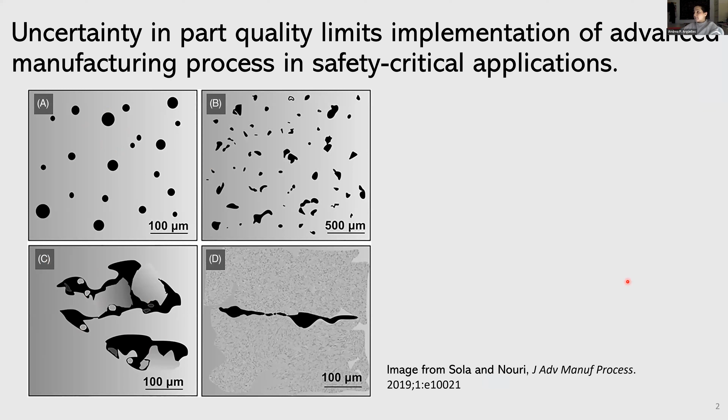For example, something like round porosity that you see in the very first figure is going to affect the response of your material quite differently from something like the figure on the third panel, where the damage is more localized, and that's going to act as a stress concentrator differently from a distributed porosity like this. When we think about how characterization is usually handled, we're generally dealing with processes that require pretty extensive sample preparation.

So when we think about things like microscopy, whether scanning electron microscopy or optical microscopy, you need to section the sample and prepare the surface sufficiently well to be able to get the information that you need.

You can have properties or features in one particular section of a sample that, when you move to a different location, are not necessarily going to translate. That's essentially the problem we're trying to address. So in my group, our research is using ultrasound for the non-destructive characterization of materials.

The way I like to frame this is that we do it at multiple length scales. We're not necessarily saying we're going to get the level of precision in imaging that you'd get from some conventional techniques, but you'd be able to map it over a larger surface so that you can do subsequent inspection with some of those methods to obtain the information you need.

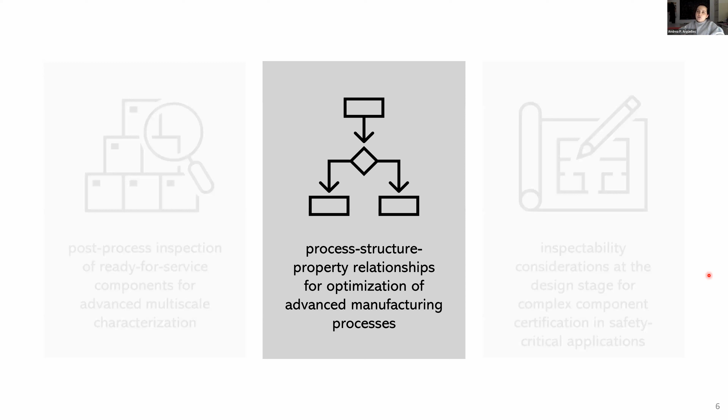But the one that I'm going to focus on today is, how do we use ultrasound in the development of process structure property relationships? Essentially, as I was mentioning before, in a lot of the structure characterization we do in conventional development and manufacturing processes, we're relying on this very time and resource intensive process of having to break samples open and understand what that internal structure is.

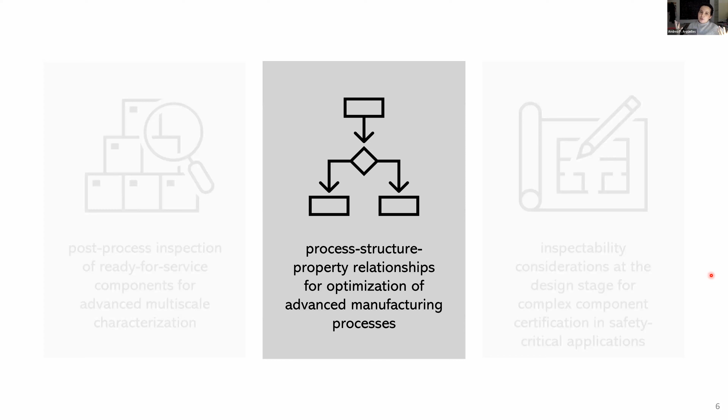So essentially what we're trying to do in my group is instead implement ultrasound as a technique that you can use to understand those internal structures, understand ultimately the performance of the parts, and then figure out how to modify the process to obtain an optimized version of the parts that you're trying to make.

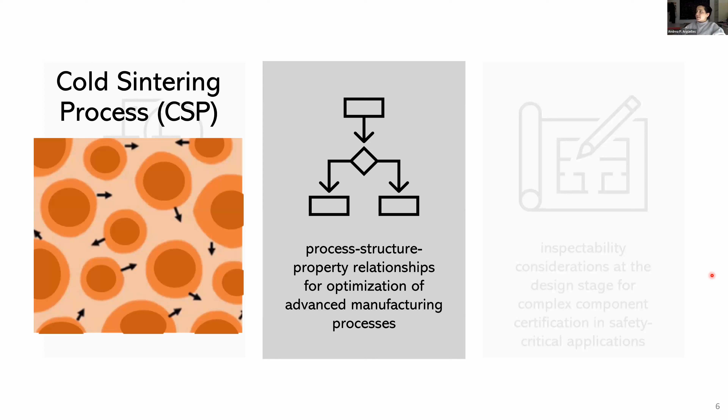I'm going to talk about this in the context of two different manufacturing processes. The first one is the cold sintering process, and the second one I'm going to talk about is binder jet printing. The cold sintering process, as the name would suggest, is a sintering procedure, and this is going to be focused on ceramic parts. For binder jet printing, this is a 3D printing application, which for that portion of the presentation, we're going to focus on metal, stainless steel specifically, parts.

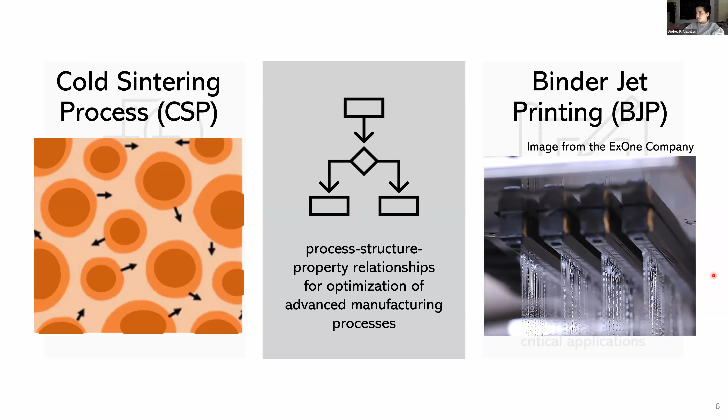So how do we actually use ultrasound to understand this? In the conventional NDE sense, we're dealing with the direct reflection of ultrasonic waves by an object in the material. So we're dealing with diffraction limited imaging, where you essentially need flaws that are at least half that wavelength in order to get a reflection from the flaw, which is fine.

We do use some of that information for some of the parts, because even though the process should be optimized to not obtain flaws that are that large, the reality is that sometimes in the responses we're getting, we're seeing that that is still happening. So we're getting direct reflections from some of the features that are coming up in the part, which I'll talk about particularly in the cold sintering components a little bit more when we get to it.

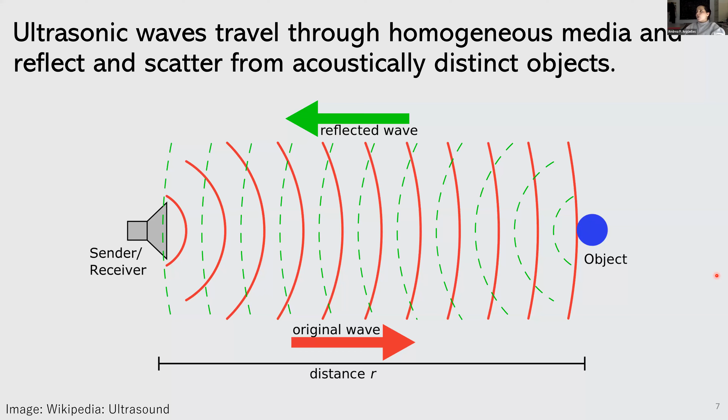But really what my group is focused on is, how do we use some other ultrasonic parameters to get more quantitative information about the microstructural features? Now, this is where we have a little bit of a trade-off. So what do we have to give up in order to get information that is at a smaller scale? In our case, what we choose to give up is the ability to directly image.

So essentially what we're dealing with is we're propagating waves through a finite volume and then obtaining statistically relevant information about the microstructure in that volume. So if you think, for example, of a collimated beam from just a piston transducer, we're essentially saying, in that cylinder that you're inspecting with that transducer, what information can I gather through quantitative parameters?

The ones I'm going to show you today are part of that first round of characterization we can do, and that is wave speed and attenuation.

As a crash course, we know wave speed is related to the effective properties of the medium the wave is propagating in. In our case, we're not going to relate wave speed to something like porosity directly, but we know there's an inverse relationship between these two parameters. So how do we get this information and combine it with some of those mechanics-based models I talked about before to obtain quantitative information about porosity in the parts?

Second, we have attenuation, where although it's also dependent on the effective properties of the medium, the main use we're applying this for is characterization of scatterers smaller than that half-wavelength limitation we talked about before. So essentially, although I'm not getting a direct reflection from the feature in the propagation path, I know my wave will lose more energy as it propagates through a volume with localized features. These wouldn't necessarily affect wave speed directly, but they're definitely impacting the scattering and absorption of that wave as it propagates through.

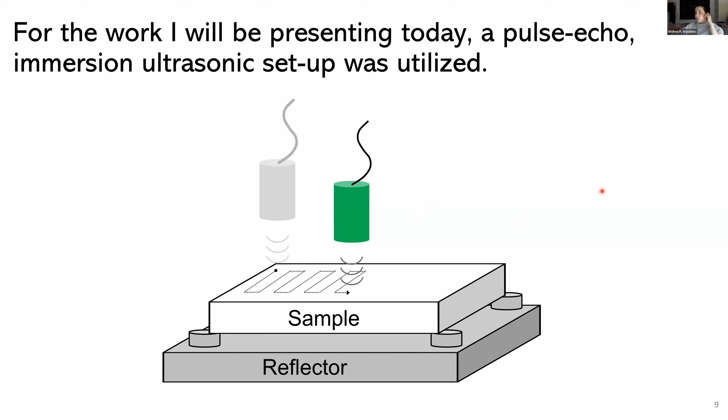So essentially, we took the samples, raster scanned them, and obtained quantitative information at every single point - a whole A-scan at every point that we could post-process to obtain quantitative information about wave speed and attenuation for the two different sample sets I will be discussing.

All right, so first I'm going to talk about the project that has to do with the cold sintering process.

The results I'm presenting here today were all collected and analyzed primarily by my PhD student, Haley Jones, and my previous master's student, Elizabeth Trotman. This is all done in collaboration with Professor Susan Trolier-McKinstry in the Department of Material Science and Engineering here at Penn State.

I assume for most of you, cold sintering is probably not something you're nearly as familiar with as ultrasound. So I thought it was important to start with a little bit of a crash course on what I mean by cold sintering.

Cold sintering, like other sintering processes, is essentially a process to apply pressure to bring particles together and solidify into a material. The main difference is that if you think about sintering a ceramic, you'd more than likely have to deal with temperatures in the 1,000 degrees Celsius range and pretty high pressures. In the cold sintering process, the objective is to bring these temperatures down significantly - hence the name - so we can reduce the energy resources needed to sinter these materials.

You have a powder that you mix with a transient liquid phase. That transient liquid phase assists in the densification of the powders once you apply uniaxial pressure, but still staying an order of magnitude lower in the temperatures we need. At the end, you have a densified solid with hopefully the desired microstructure, and we can achieve many compositions.

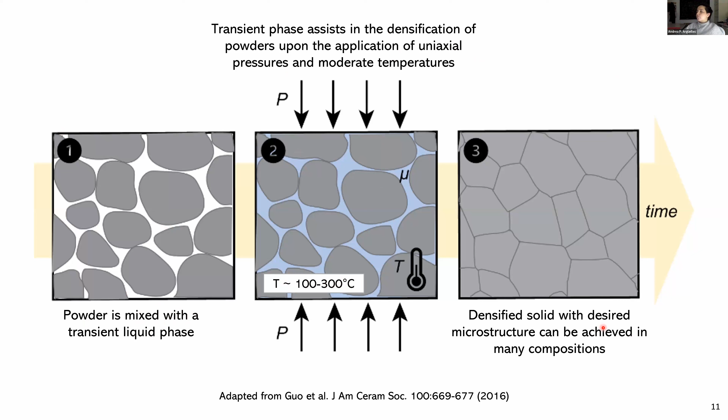The main challenge here is that we have macro and micro flaws that arise and deteriorate the mechanical and functional properties of these materials. So what I'm citing here is a couple of different things. First, let's talk about the picture in the background.

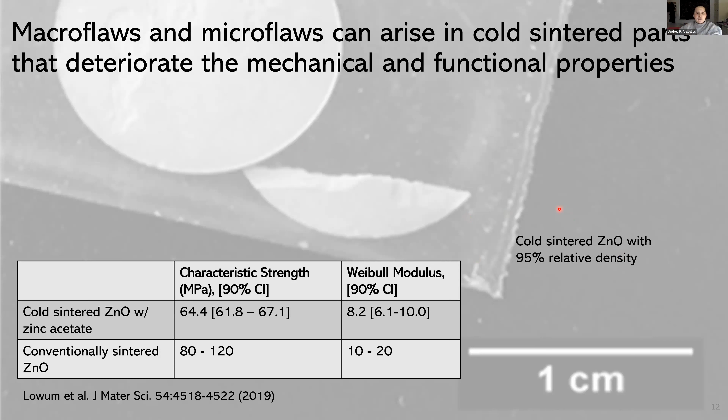As I mentioned, the standard is to use relative density measurements, and as you can see from the example in the back, and from some more in-depth data we've collected, that's not necessarily reliable. So what we wanted to do was say: if we create a set of samples that has some range of relative density, how does that compare in the context of their ultrasonic properties? And is that more representative of the mechanical and functional properties we're getting for the parts?

So what we did is we took two sets of cold sintered zinc oxide samples, and the main difference here was that we dealt with two different transient phases. That liquid phase that I talked about that facilitates sintering—I'm going to come back to that, because it turns out that transient phase is actually critically important, and ultrasound allowed us to identify some of the ways in which it affects the final part.

So we did two sets of that, and you see we have a range in the relative densities that goes from 80 to 97%. In order to obtain that range, we needed to change things like the pressure, the temperature, and the sintering time. And then the final thing we played around with, because of what ultrasound enabled us to characterize, was the heating rate.

That brings us to some of the ultrasonic results and what we learned from this type of analysis. The first thing we did was look at the wave speed—a pretty simple metric to start with. We were collecting full A-scans at every location, and we could do a cross correlation and get a quantitative measure of the wave speed, again thickness independent based on the type of measurements we were collecting.

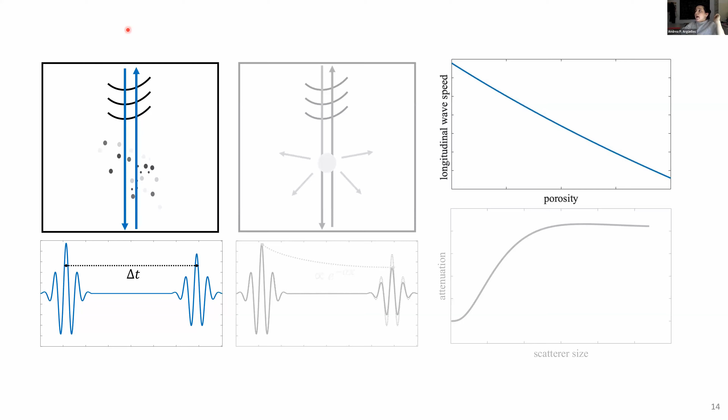In doing this, we were able to identify some of the things happening in terms of the evenness of the pressure applied on the parts, and the evenness of the temperature distribution of the part, as well as that liquid phase distribution.

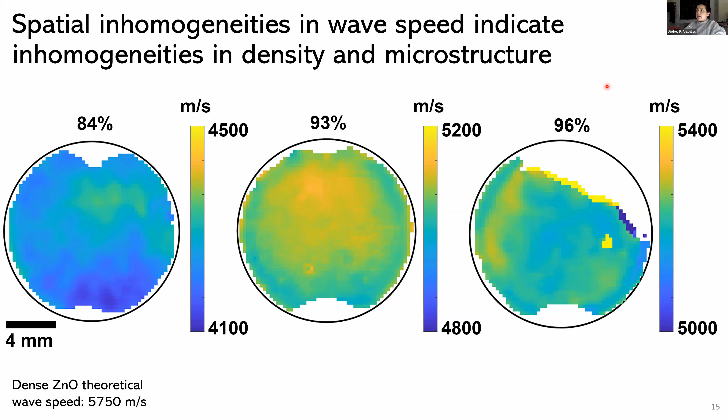That already started sparking some conversation about what could actually be causing the difference between these. The other thing we noticed is that because we were using geometric relative density values, a lot of times we were missing the fact that for some of the larger samples, there were actually large delaminations that we get direct reflections from. So this is already quite informative in the context of what was happening in the sintering process and the changes we could make to the processing.

So again, by characterizing the samples with ultrasound, we were able to identify some of the pieces that we could put together and ensure that we were getting a more uniform sample.

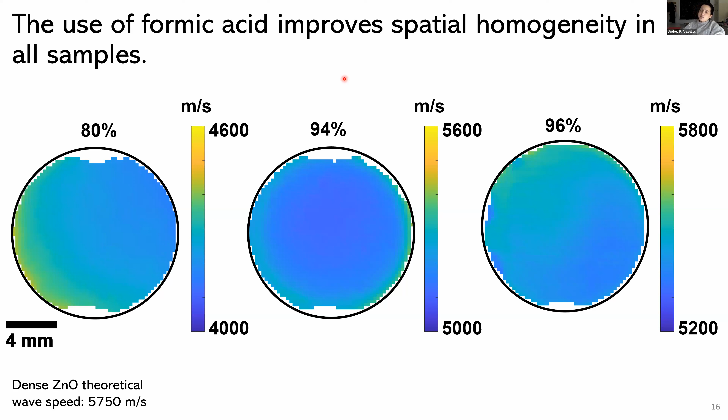So this was all great in identifying individual samples and their variations, but what we really wanted to do was now understand, on average, some of these average properties—why weren't these samples matching up with what we would expect for a fully dense zinc oxide sample.

So what you're going to see in the next couple of slides is that we actually started to look at some micromechanics models to understand the effective elastic modulus of each of these samples relative to the shape of the pores that were within them.

We knew for a fact that there was going to be porosity—we had relative density measurements that reflected that. But what we did not know was whether those pores were fairly spherical and uniform in shape, or if they had some preferential shape that we were perhaps capturing with some of our ultrasonic results.

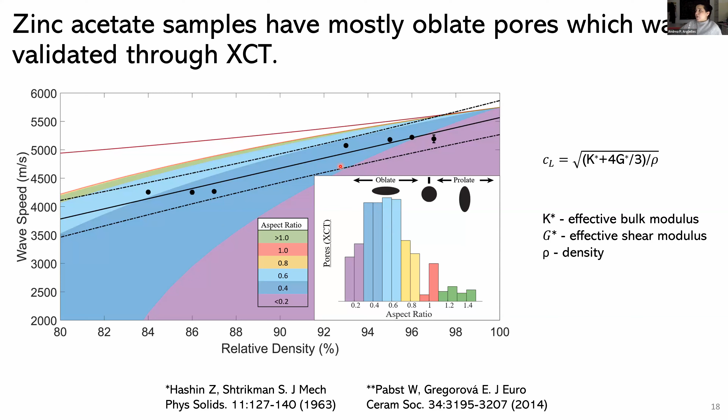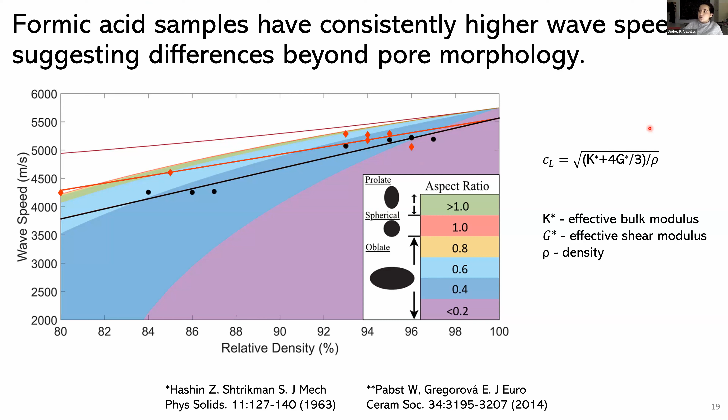Part of what this illustrates is that samples processed with a different liquid phase are going to have different effective properties. This can help us identify different parameters we can change in that manufacturing process and understand how these parts behave, which brought us to the analysis of some of our ultrasonic data.

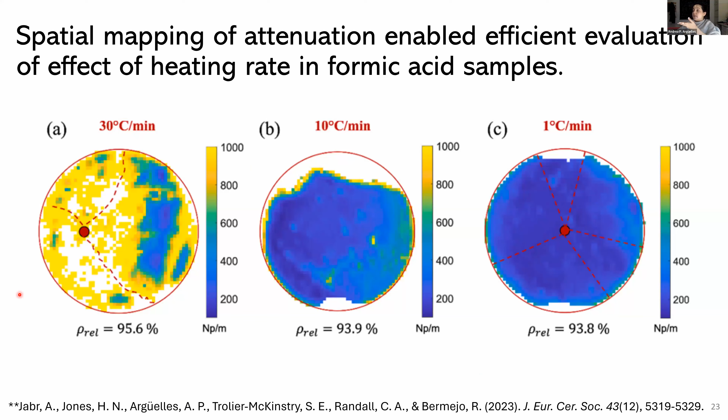And the use of ultrasound for characterization allowed us to do this a little bit more efficiently. So we didn't have to create a large volume of samples to test at the different temperatures, but rather a smaller set, while also giving us that information more conveniently.

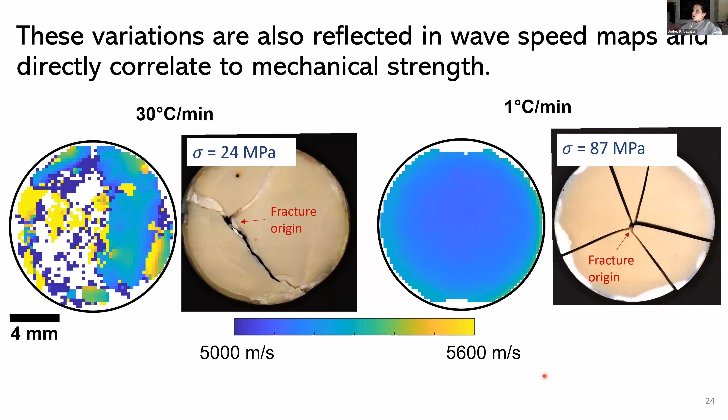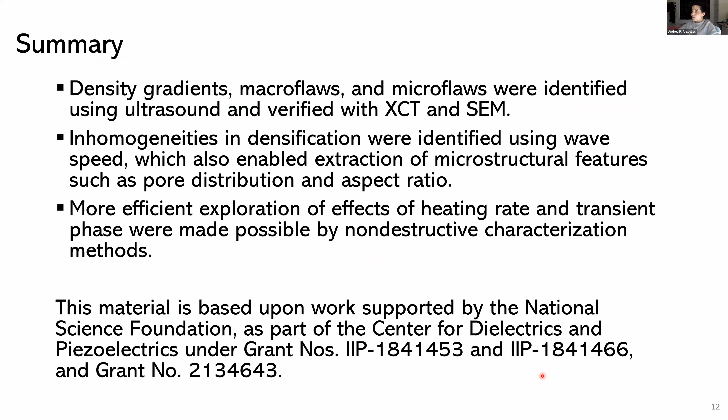This material was all supported by the NSF grant that I listed at the beginning. You can kind of see in summary some of the variations we were seeing with the samples. Which brings us to the second set of experiments I want to talk about, the binder jet printed samples.

So we're switching over to metals and to a 3D printing process. This work was supported by the 3M company. Most of the results you're seeing here today were obtained and analyzed by my student Olivia Cook, a PhD candidate in my group. This was done in collaboration with Alison Beese in the Department of Engineering, Science, and Mechanics, and her student Nancy Huang. Chris Kube was also involved in the analysis of the data you're seeing in this section.

For those of you not as familiar with additive processes, or particularly with binder jet printing, it's essentially like a lot of the other powder bed processes where you're laying a layer of powder and additively creating a 3-dimensional shape. The main difference in binder jet versus something like powder bed fusion, where the powders are fused together using a high intensity laser, is that in binder jet we're using an organic binder.

The organic binder essentially just holds the particles together for now, and then you go through a secondary step of either sintering or infiltrating with a second material to actually bond everything together. So you burn off the binder and then you either infiltrate with a second material or just sinter the part itself. We've done analysis of both infiltrated samples and sintered samples.

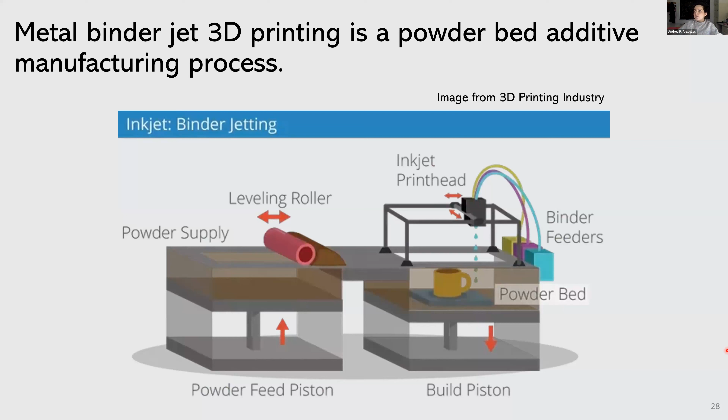I'm only focusing on the sintered samples today, particularly a sintered block of stainless steel 316. Now, I feel like most of you can probably relate to the fact that we wanted to start with the simplest case scenario and just start with a sample that we thought the behavior would be rather simple. We could establish some baseline in the ultrasonic response and then move on in complexity.

So we wanted to do just a block that was an inch by an inch, couple inches, so 25 millimeters, and 50. We just wanted to ultrasonically test that. This is what the company that provided the samples said was their optimized process, surely this is going to work smoothly, and these are going to be samples that are rather easy to analyze.

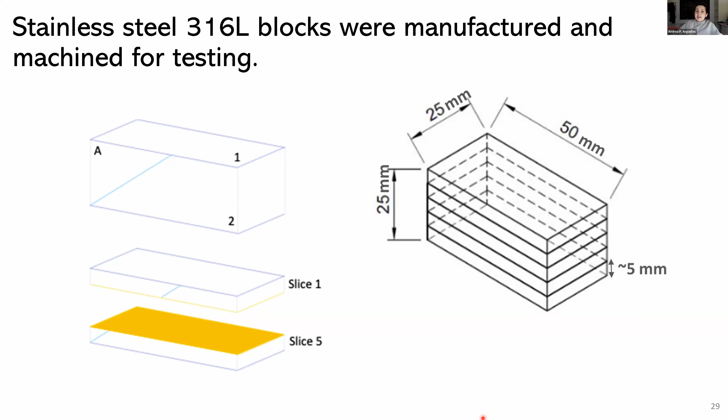But the reality was that once we started doing that testing, we actually got quite low transmission through the center of the samples and much higher transmission around the edges. So this was already suggesting that the samples weren't necessarily as simple as we anticipated.

And it ended up being a pretty interesting analysis of what resulted from these samples. So it was all good in the end, but this was kind of our first indication that maybe these samples are not responding the way that the manufacturer thinks they are.

Now, to begin with, these were fairly large samples, an inch in height and width, so that didn't necessarily lend itself to very detailed analysis. So we went ahead and sectioned the samples and rescanned them with our thickness independent method to get wave speed and attenuation on some of those thinner slices.

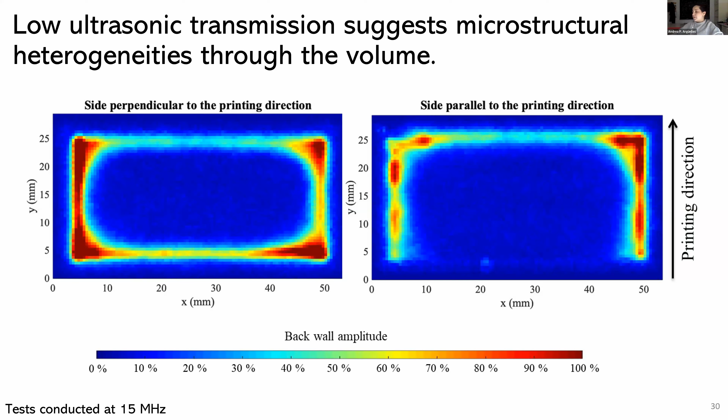The samples were sectioned something like this. So you have the printing direction, and then the slices just kind of cut across as we go through the depth of the sample.

Now, when we cut up these samples, we kind of expected that porosity was going to be the dominating factor. You know that's kind of the name of the game when it comes to additive manufacturing. Porosity seems to be that primary issue, so we assumed that would be what dominated the response we were seeing in these samples. When we look at the attenuation results, that supported it.

So we cut up the samples, and you see that the sample in the middle has higher attenuation, while the ones at the edges have lower attenuation. That makes sense - it's all in line with the fact that we're getting low and high transmission in those areas respectively.

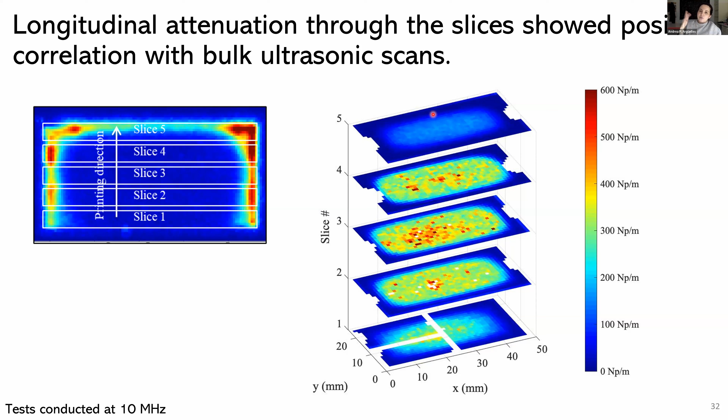But then when we look at the wave speed, if porosity was the driving factor, we would have really anticipated that as soon as you're moving away from the edges of the sample and towards the center, the wave speed would immediately drop, and we'd see that relationship to porosity. But that's not really what we were seeing. We were seeing about a 5,800 meter per second wave speed, and then it would jump to about 5,900 before actually dropping to a much lower wave speed in the very, very center of the sample.

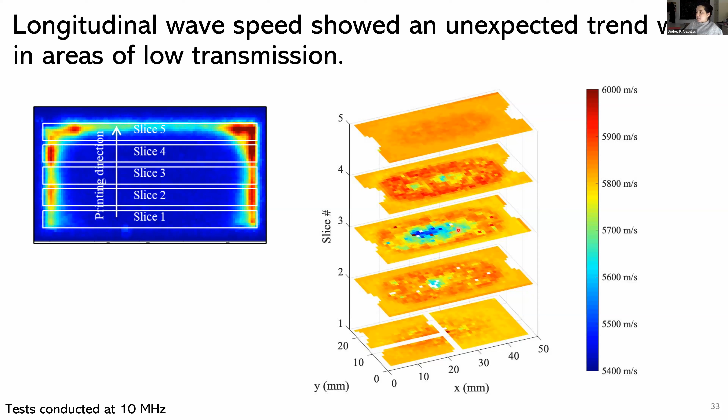So we went ahead and did a little bit more quantitative analysis of the porosity at the different interfaces. We took the samples and did optical microscopy, sectioning the different pieces, and sure enough, there was a little bit more porosity right in the center. But going from the edge to that middle region of the samples wasn't really supporting that porosity was the driving factor in our ultrasonic response.

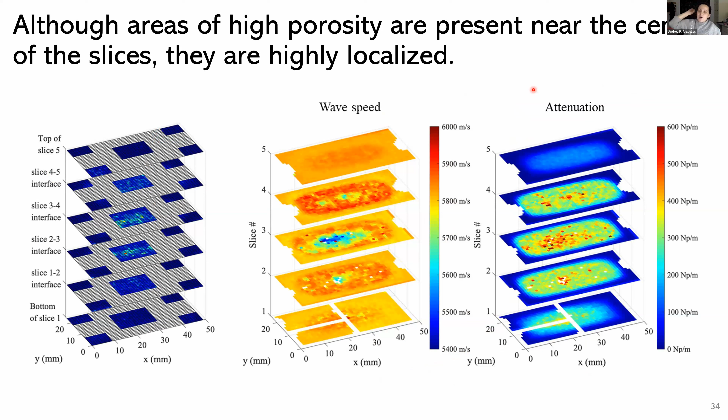Now, being someone trained in scattering and polycrystalline media, obviously our next thought is always to go to grain size, and that's exactly what we did. What you see was actually rather interesting, particularly in the context of what had been previously reported for binder jet samples.

And then the other thing we noticed that we thought was interesting was that in the center to edge region, the pore structure we were seeing in the samples was round and isolated. But then once you got to the very center of the sample - and we could only look at this in the 2D plane, at least for now - what we saw was that the pores were pretty irregularly shaped. This got us wondering how these pores were actually to be represented if you were to look at them in a three-dimensional space.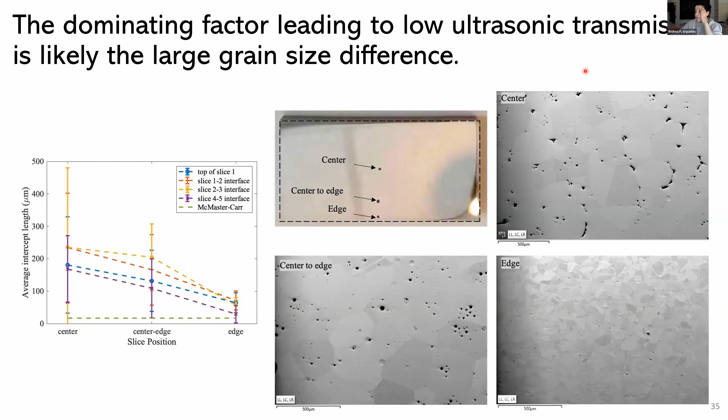So in order to analyze that further, we took some tensile specimens from an equivalent block. This wasn't the exact same block we had tested before, but it was created with the exact same conditions. We took them from different regions that we knew were going to have a little bit of that varying response - so we wanted some in the area with really small grains and almost no porosity, some in the area with large grains where the pores were in the grains and the boundaries, but rounded and separated.

And then some where you had this much more irregularly shaped pores, mostly concentrated between the grains, and see the response of these and how those varied.

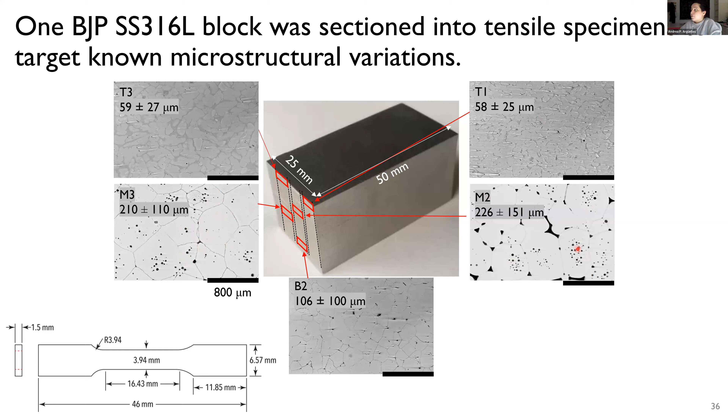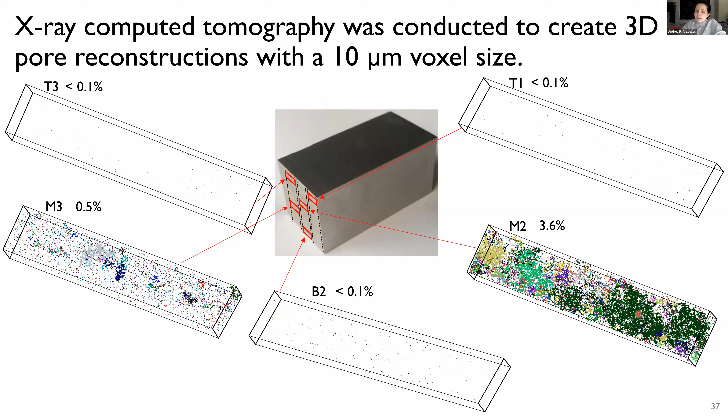So this was already pretty informative in terms of what was happening in the behavior of these parts. So we went ahead and did our same ultrasonic measurements as before - thickness independent wave speed and attenuation mapping.

And then for the pore reconstructions now, they're simply oriented in the plane that the wave is seeing it in. All of these measurements were longitudinal waves that were normal to the surface. So we essentially just reoriented the maps so that we could one-to-one look at the relationship between that and some of the ultrasonic parameters.

In order to do that, we separated our analysis between low and high porosity regions. The way we defined this, just for the purpose of this analysis, was anything less than 0.5% by volume is considered a low porosity region. We separated our data relative to the voxel size we were able to obtain from the transducers we were using and the spatial resolution of the maps we collected.

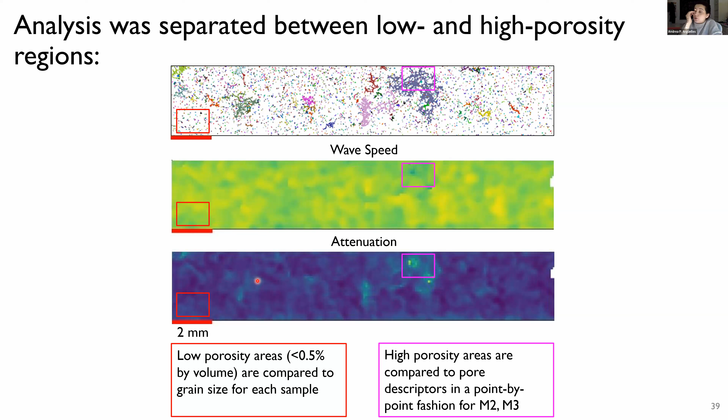High porosity areas would be anything where the porosity to that volume was greater than that 0.5%. And then we went ahead and calculated some pore descriptors based on the XCT data that we could then directly correlate to our ultrasonic parameters.

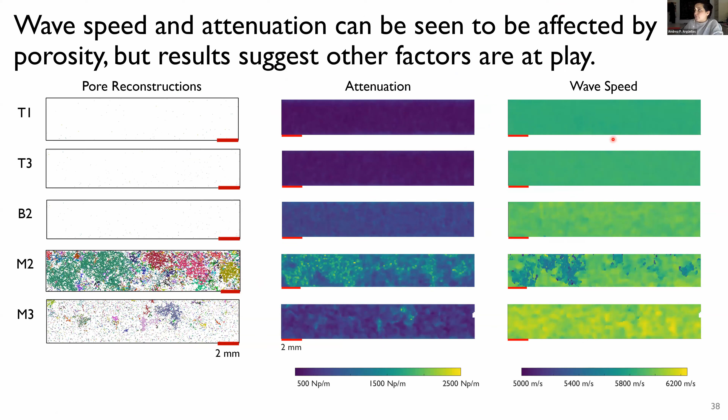And what we saw in those low porosity regions is that this was all dominated by that change in grain size that we had identified in the larger blocks.

So we went ahead and represented Stanke and Kino's unified theories for scattering in polycrystals. We did the wave speed as a function of that grain diameter. And although the error bars are large, expectedly, because we have a distribution of those grain sizes, we see...

that the change in wave speed we're seeing across the samples is dominated by that change in grain diameter. So porosity is not playing as big of a role because we're talking about less than 0.5%, and the variations we're seeing in grain size are rather significant.

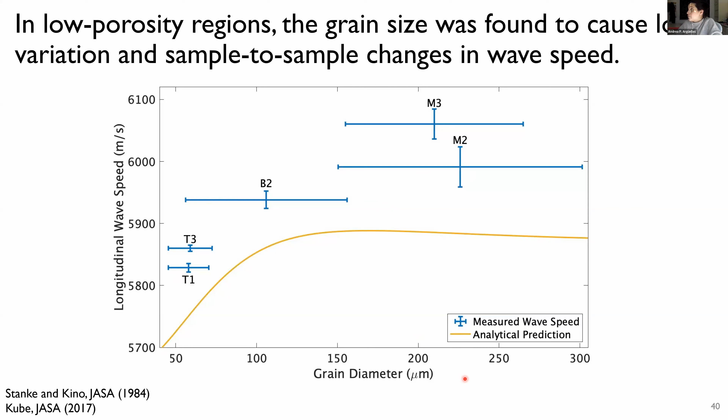Now, if we look at the regions where the porosity was high, we needed to be able to essentially convert our three-dimensional X-ray CT data into a 2D map. So we went with a couple different features that you could look at.

So we took a voxel of X-ray CT data and propagated that all the way through the thickness of the sample, since that's essentially what our ultrasound was doing. And we calculated in that little volume the pore volume fraction, the average pore volume, and what we call the projected pore area.

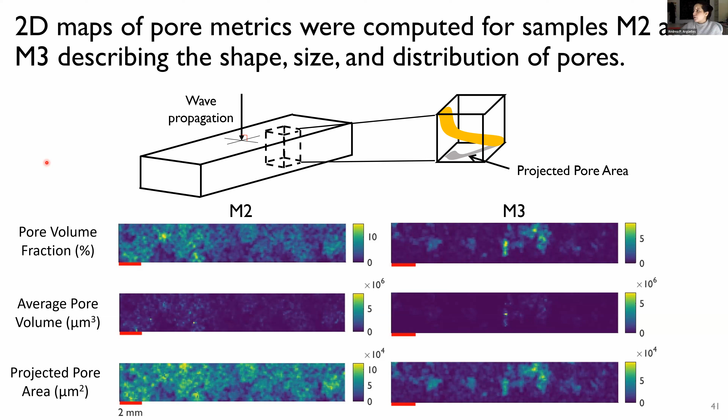So essentially, if we had a pore that was oriented like this, we wanted the area that would actually be perpendicular to that wave propagation direction, since we anticipated that might have good correlation to the ultrasonic parameters. Keep in mind, we considered a lot of other metrics that are not shown here. These were the three that showed the most significant correlation to our ultrasonic results.

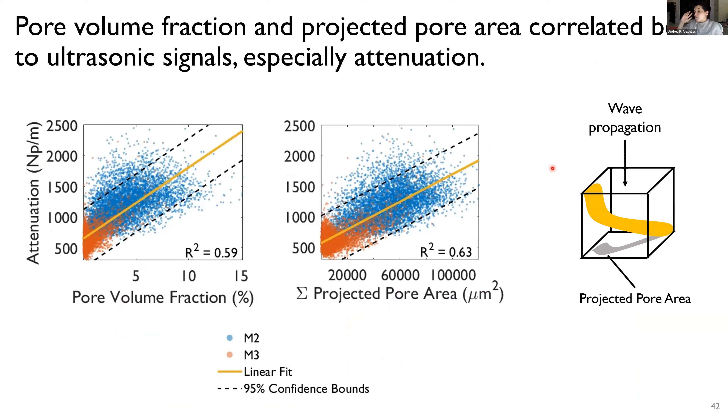In doing that, we did point-to-point correlations, and we saw that both the pore volume fraction, as expected, but also some of the projected pore area showed pretty decent correlations on a point-by-point basis to the attenuation measurements, which was really good to see, as it could give us quantitative information about what was happening in these samples. I think some of the more interesting results are actually on the wave speed side.

One of the things we saw was that if we were to consider the spread of the wave speed, there's a lot of scatter in this lower region. If I were to draw a line just below the 6,000 mark and consider the data falling outside of that, it's not really following much of a quasi-linear trend you'd expect from, say, Mori-Tanaka or a Hashin-Shtrikman model.

That's going to give you that quasi-linear relationship between wave speed and pore volume fraction. But what we noticed was that if we were to threshold the wave speed by those values where we knew there were regions of highly interconnected porosity, then the slope of the line, once you eliminate this lower data, is actually a lot closer to that Mori-Tanaka estimate.

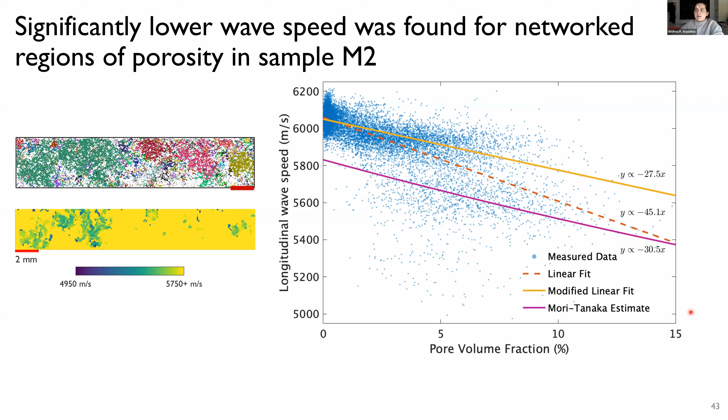Now, obviously there are some simplifications in this analysis. The Mori-Tanaka model is still assuming static properties, so there are inherent assumptions there. But there are reports that the effective modulus in a static problem is going to be more significantly affected if your porosity is interconnected versus evenly distributed. So this was kind of exciting to see that we're seeing that reflection in our ultrasonic data as well.

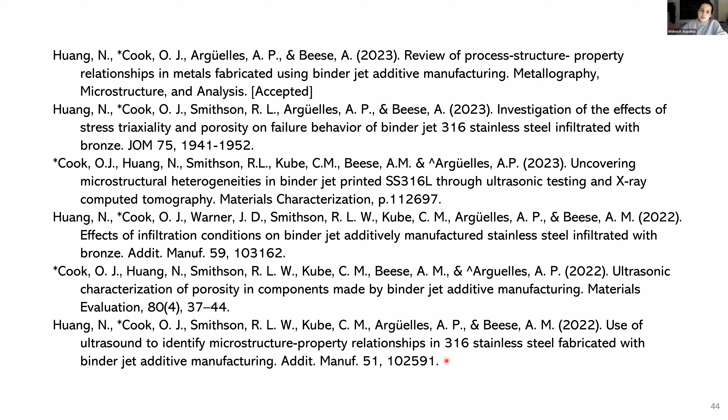This work has been going on a little bit longer, so there are quite a few publications related to this analysis. The results I showed you today are primarily in this one - the X-ray computed tomography, this materials characterization paper, and also this additive manufacturing paper, which shows you the results on the slices. We're happy to share any of those with you if you have trouble accessing them. A lot of interesting information was gathered from this data set.

This was all supported by the 3M company. The grant is listed on the slide, but this was all very encouraging in the context of the kind of information we could extract when using ultrasound to understand the underlying structure of some of these parts.

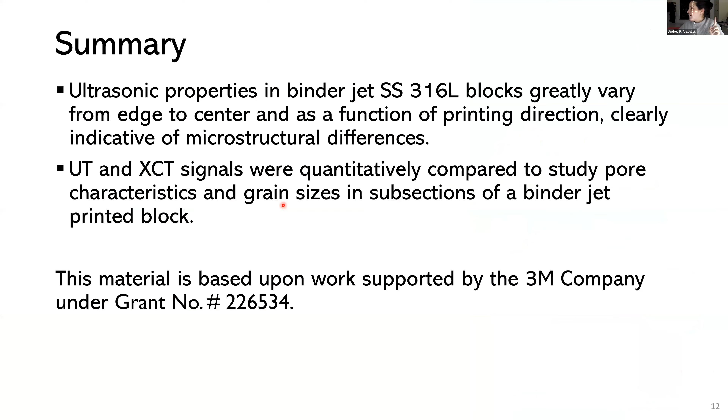No, thank you. And any other questions?